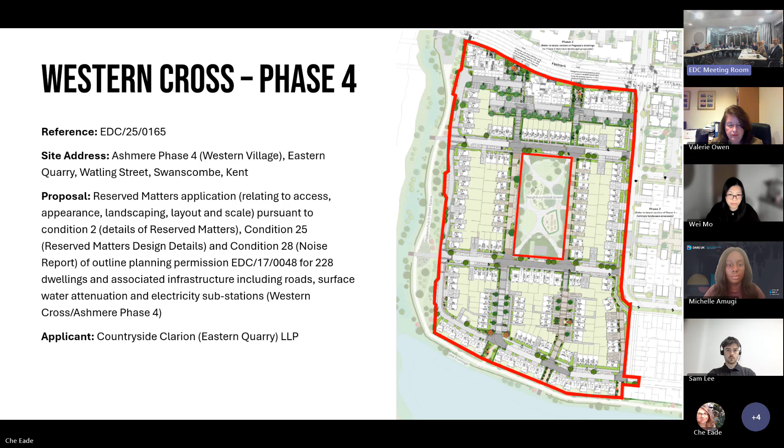So to the main presentation, I can confirm the proposals before you tonight are made by Countryside Clarion LLP and seek permission for all reserved matters for 228 dwellings, comprising 87 one- and two-bed apartments and 141 two-, three- and four-bed dwellings, made pursuant to conditions 2, 25 and 28 of Eastern Quarry's outline planning permission.

The application site is located within Eastern Quarry, also known as Whitecliff, which forms a strategic development site within the EDC area comprising 3 villages, including Western Cross, previously referred to as Ashmere. The master plan for Eastern Quarry embeds principles of sustainability in creating walkable neighbourhoods and a fast-track bus corridor, now operational through the site, providing regular public transport connections to Ebbsfleet International Station, Bluewater, and the centres of Gravesend and Dartford beyond.

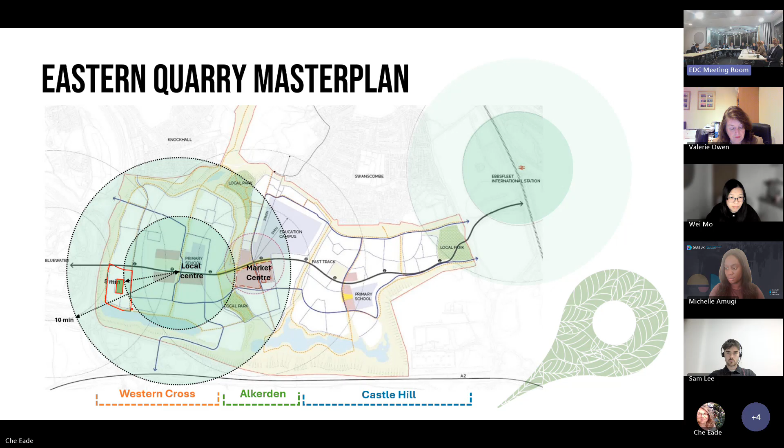The site is located in the southwest corner of Western Cross, within a 5 to 8 minute walk to the planned local centre within this village, and within a 10-minute walk to the Alkerden Market Centre, which contains the education campus due to open in September 2026, and the Alkerden Community Hub, expected to be operational in 2027. The site is bound by Fast Track to the north, Western Cross phase 3 to the east, and public open space to the south and west.

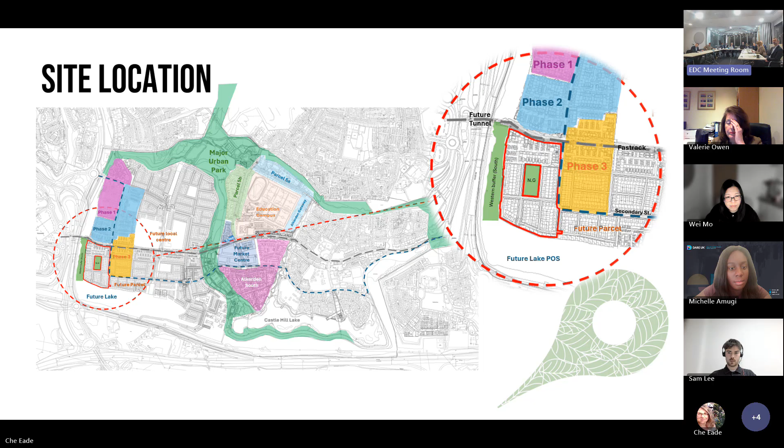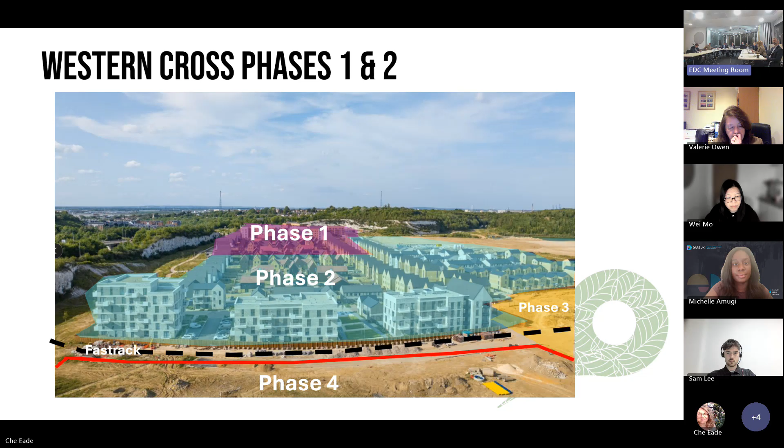Notably, the central neighbourhood green has been omitted from the submission, as it would be delivered separately by the Whitecliff site-wide developer Henley Camland. The proposed development follows on from Countryside's earlier, now award-winning phases to the north of the site, phases 1 and 2 pictured as built on screen, and their third phase to the east, which was approved by this committee in March of this year. Also shown is the current route of fast-track buses, which turns northwards through phases 2 and 1 currently, but will eventually continue west through the fast-track tunnels to Bluewater, due to be completed in 2027.

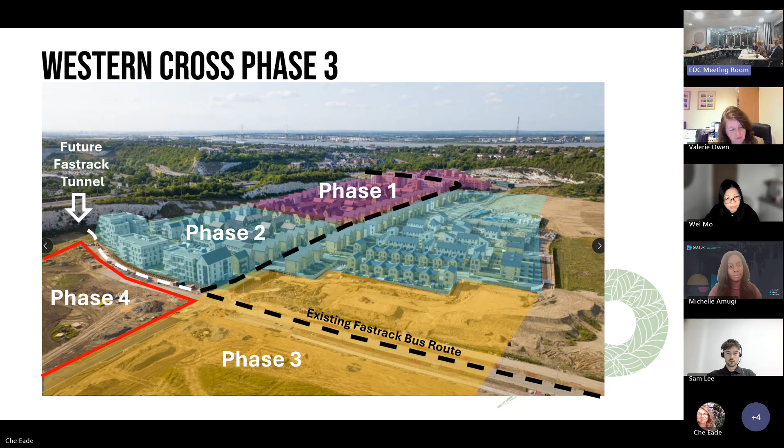In terms of access and layout, the proposals comply well with the layout and street typologies identified in the Area Master Plan and Design Code for Western Cross. The layout prioritises connectivity, legibility and pedestrian experience through a permeable grid-style street network and integrates seamlessly with previous phases to the north and east of the site. The primary vehicle access is from the secondary street on the eastern boundary, continuing the roadway established in phases 2 and 3. Tertiary streets run east to west, providing the primary vehicular connections through the site, while mews streets introduce shared surfaces around the neighbourhood green and southern footpaths, prioritising pedestrians and cyclists.

In terms of car parking, the scheme utilises a number of parking typologies to ensure visual impact on the public realm is minimised. Parking for the proposed houses is primarily provided as on-plot tandem parking. Terrace houses will largely utilise well-landscaped forecourt parking, and parking for the apartments is provided within undercroft spaces and carefully landscaped parking courts.

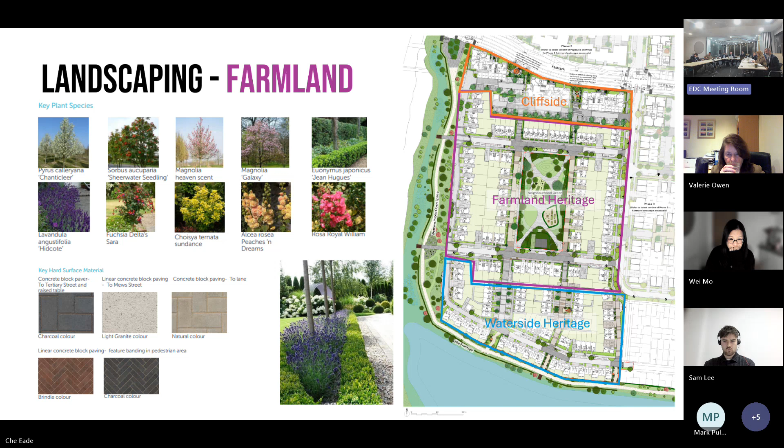The farmland heritage area focuses on spring blossom trees, ornamental shrubs and herbaceous species to reflect the informal orchard and farmyard character. And the waterside heritage landscape creates an informal setting inspired by its proximity to the water.

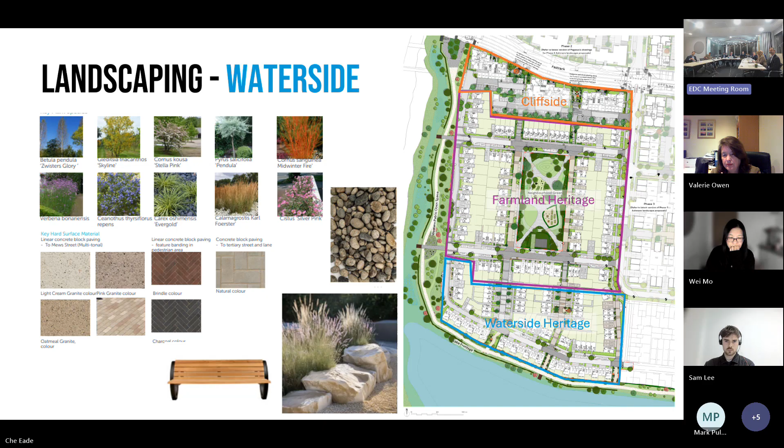Street furniture across the scheme complements these 3 character areas, and the landscaping is supported by a comprehensive landscape management plan, ensuring long-term maintenance, and planning conditions will secure detailed planting schedules, hard surfacing and boundary treatments. Overall, the strategy delivers a high quality, biodiverse environment and reinforces the site's character to create a strong sense of place. Turning to matters of scale and appearance, the applicants have developed a coherent approach to architecture and character which

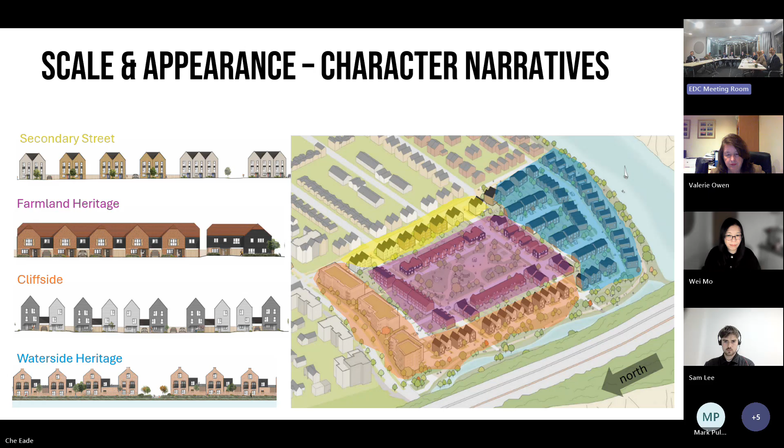mirrors the preceding phase along the secondary street and establishes 3 other character areas, being the cliffside area along Fastrack and the Western Edge, farmland heritage around the neighbourhood green and waterside heritage to the south of the site. The cliffside area along Fastrack provides bold apartment buildings to frame the edge and Fastrack gateway and reflects that which has been completed on phases 2 to the north.

A restrained palette of white, grey and buff brick alongside deliberately varied roof lines reinforces this geological character and creates a sharp contemporary frontage. Balconies use perforated metal panels with organic patterns that reference cliffside planting, and touches of green bricks are used in parts to suggest vegetation.

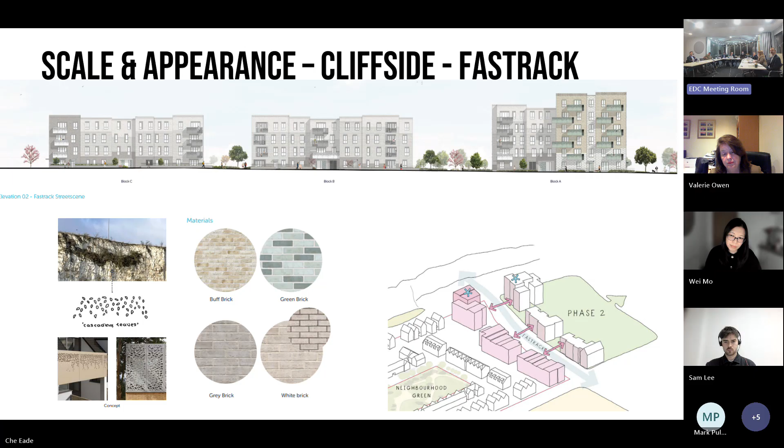The houses along the western edge comprise grey and white detached weatherboarded homes overlooking cliffs and continue the form and appearance of Western Edge established in phases 1 and 2.

Farmland heritage occupies the centre of the site around the neighbourhood green. These buildings introduce a softer domestic scale with architectural drawing inspiration from Kentish farmsteads. Terraced and semi-detached homes use red brick and horizontal weatherboarding or tile hanging with clay tiled roofs and simple timbered porches to create warmth and familiarity.

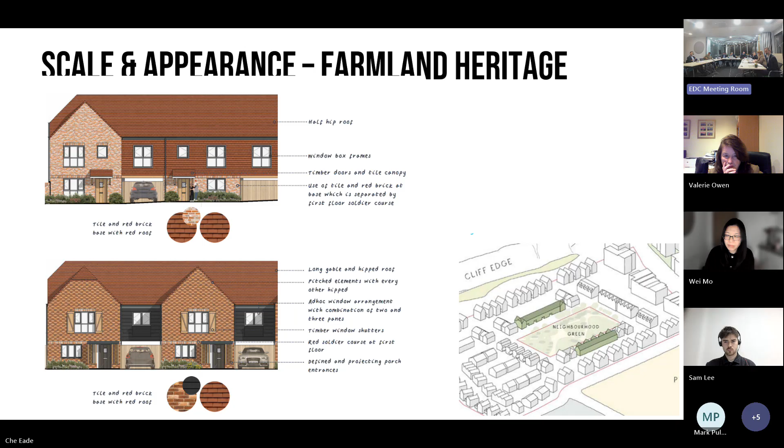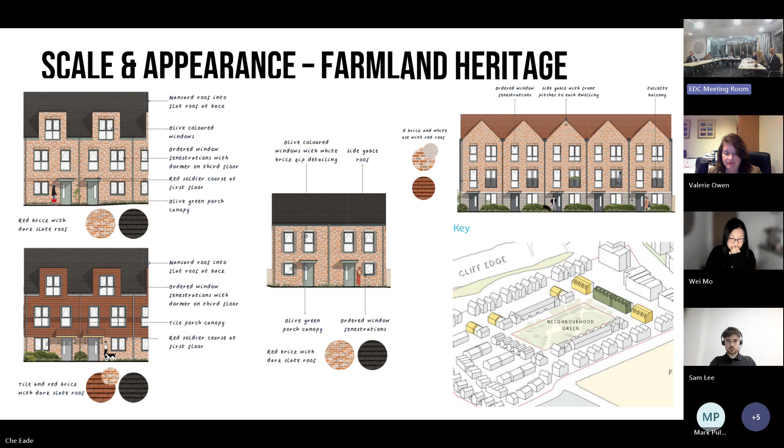The details such as soldier courses, corbelled eaves and occasional patterned brickwork give the buildings texture and a sense of craftsmanship, while more formal, symmetrical frontages around the neighbourhood green help to define it as a central space.

The waterside heritage character area draws on its industrial language of wharves, warehouses and traditional terrace house forms. The homes situated in this part of the site rely on robust red brick with darker slate accents. Wide gables and sawtooth roof forms nod to dockside architecture, and striking detached homes with side gardens and distinctive gable features punctuate the lake edge.

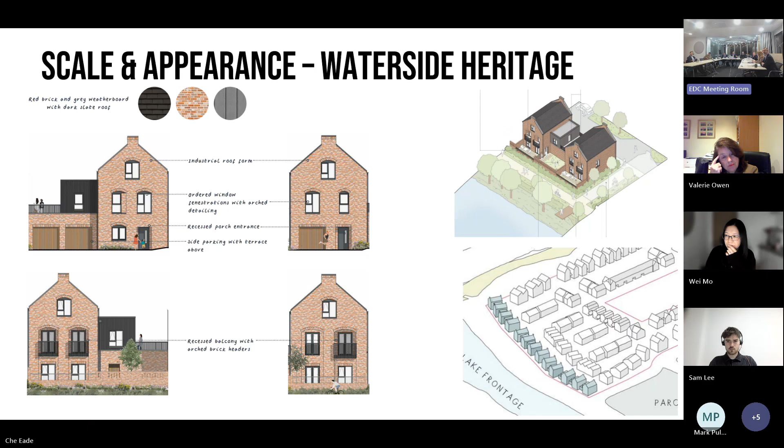When taken together, buildings and streets are visually appealing. The use of different character typologies as part of the wider narrative is effective in providing visual interest throughout the scheme and will also assist wayfinding and is viewed positively by officers.

The proposed development ensures delivery of 57 affordable homes, equating to 25% of the total required by the Section 106. 11 houses are proposed for affordable rent, and Dartford Council has confirmed that they are satisfied with the proposals, noting it would directly address local need and help tackle current shortages for socially rented larger family homes.

As one of the first schemes to be fully tested by EDC officers following publication of the EDC sustainability guidance, which stems from the latest Dartford plan and Ebbsfleet's environmental sustainability framework, the applicant's submission is supported by a detailed energy statement, sustainability assessment spreadsheet and circular economy statement, and completed versions of the EDC sustainability appraisal, shown on screen. The sustainability performance of this phase is mixed but progressing.

Carbon and energy measures achieve mid-level results, with PV panels limited to apartments, but air source heat pumps and smart meters included. Circular economy principles are embedded, committing to 30% reused materials, 50% responsibly sourced, and zero non-hazardous materials to landfill. Health and well-being performance is strong, with homes meeting accessibility standards, excellent daylight, and benefiting from good transport links. Water efficiency meets 104 litres per person per day, supported by rainwater butts on houses.

Natural environment measures include green roofs and food growing spaces, and while urban greening and tree canopy coverage could have been improved, biodiversity features like integrated bat and bird boxes are noted. Overall, the scheme leaves scope for more renewable energy and on-site SUDs.

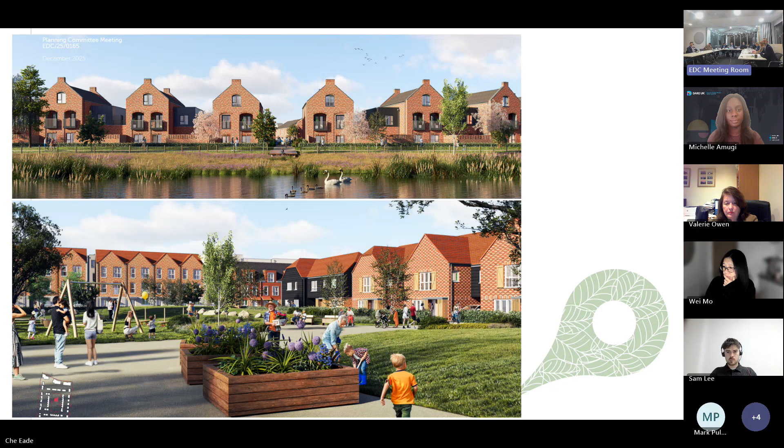However, it exceeds the baseline standards and will deliver meaningful carbon reductions beyond minimum regulatory standards and is therefore supported. Overall, the proposals are considered to deliver a high-quality scheme which accords well with the Area Master Plan and Design Code and is policy compliant.

The scheme scores very highly on the Building for a Healthy Life assessment, achieving the maximum 12 greens. It's 100% compliant with nationally described space standards and provides a range of unit sizes to meet the needs of a variety of occupiers. Parking provision is compliant with the Sustainable Travel Strategy and supported by a robust car parking management plan. 100% of units meet Part M4(2) of the building regulations, which considerably exceeds the 25% required by the Outline Planning Permission.

Therefore, in conclusion, this is a positive scheme which will deliver high-quality homes contributing to the ongoing development of Whitecliffe and Ebbsfleet. It is therefore recommended for approval, subject to the conditions detailed in the committee report and as amended in the supplementary. Thank you.

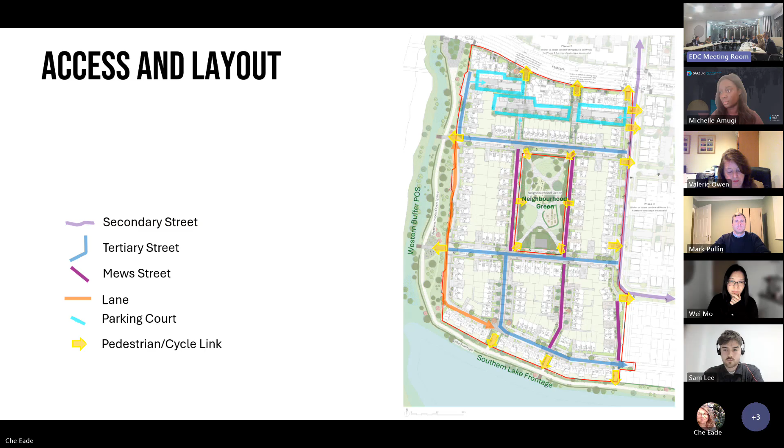Well, we did consultation before we submitted the application. Had very little interest, I would add. We were completely transparent on what was being provided. At that stage, I think the visitor parking ratio was even lower than it is now for you, so it's gone up since then. So we've had no concerns raised by residents.

I think as well, Sam Lee - I work for Ardent Consulting Engineers, I'm the transport consultant on the scheme. Part of that as well is the car parking management plan that's going to be conditioned as part of any future consent. So that's a monitored document which will be reviewed. So any issues that may arise or potentially could arise will be monitored as part of that. So it's something that we are looking towards.

Thank you. I've got another question on that, but I go to Michelle first please. Thank you. So just a question around the management of the communal green areas under development. I just wanted to clarify whether that will be under Henley Camland's responsibility, or if the developer, the builder, will be overseeing the landscaped communal areas under development.

So are you referring to the neighbourhood green in the middle there? Yeah, the park and then the other green areas around that don't belong to people. Yeah, so the neighbourhood green in the centre of the site will be the responsibility of Henley Camland to deliver and maintain. What I would say is the managing agent for the scheme is a company called RMG. They're managing phases 1 and 2, but they also manage the entirety of Eastern Quarry, so they work on behalf of Henley and us. So there's direct interface between the residential areas and the wider estate areas - it's the same company that manages the whole thing.

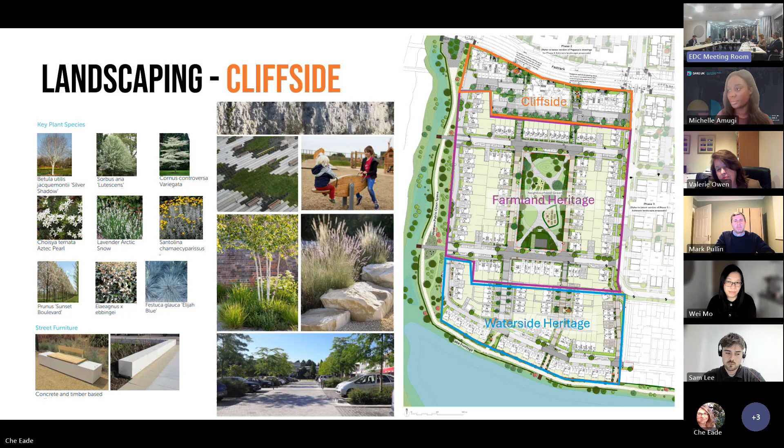But just on the parking, I noticed that the standards are complied with, so that is, you're given the standards, you try to work to them. But I noticed that on the table at 6109, committee report, page 51, it excludes the 66 second tandem spaces, which may or may not be used by people living there or by people visiting.

But my question is about Fast Track, because Fast Track is now serving this part of the site, which it wasn't when some of the original development took place. And what I'd quite like to know is, has there been - and it may be this is for the officers rather than for you - has there been take up of Fast Track? Have people been using it? Because in the end it will go through a tunnel to Bluewater, but it is up and running. Having seen it, are people using it?

I can come back to you on that, Chair. So yes, Fast Track was commenced through Eastern Quarry, Whitecliff in September.

Essentially from that point, Route E that supports this section has seen a doubling in patronage. I got November statistics through the Whitecliff Fast Track working group, which noted that for November we had approximately 20,000 journeys on that route, and a quarter of those boarded at Whitecliff, at the stops within the quarry. So I think that's significant.

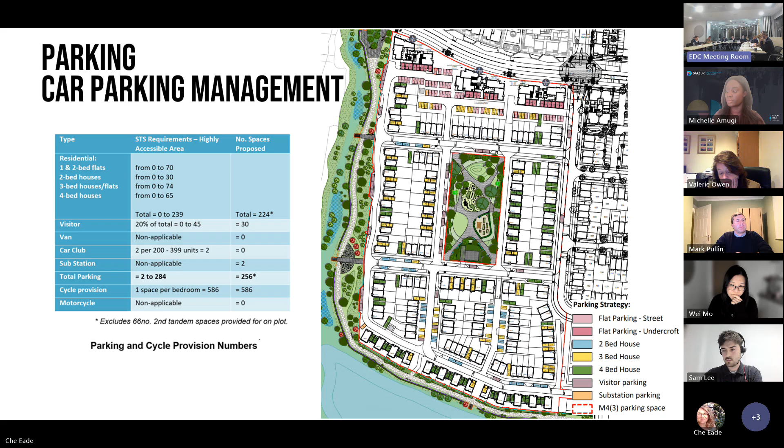First one, really around sustainability - you said the scheme exceeds building regulation requirements. In terms of PV, coverage is quite limited, just to apartments. I think it'd be useful to understand why it's not more widely used. The second question was about the risk of overheating on particular units, and you mentioned consideration of that. It'd be useful to know more detail about how the risk of overheating is going to be tackled in those units.

Okay, I will answer these - chip in if you've got anything to add. On the PV front, I think what we're managing to achieve is a significant carbon reduction through the use of air source heat pumps, fabric-first approach, etc. The PVs are being provided to the apartments, which more readily support them en masse, but for the houses, we did explore that, and they're being designed so they'll be structurally sufficient to accommodate PV in the future should people want to install them. So that's the approach on PV.

And then the other question was on overheating. An overheating assessment has been undertaken. That has to sit alongside the sunlight daylight assessment and the noise assessment, balancing off those factors. The conclusion is that there are some apartments, very limited, in Block A, top 2 floors, which could suffer from unacceptable levels of overheating. But those apartments will be fitted with mechanical ventilation heat recovery systems that provide cooling, so they don't have to open their windows where there's a noise situation.

Any other questions from members? Michelle?

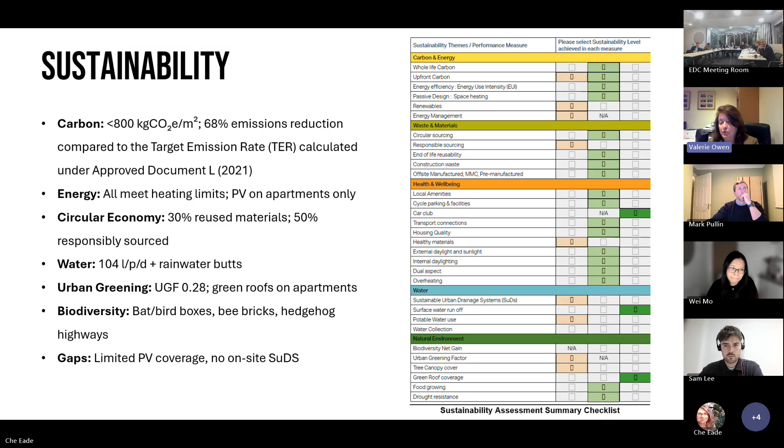Thank you. So leading on from that, you then discuss the mix itself and the lack of larger homes, and basically say, well, Dartford thinks it's okay, so we think it's okay. But I find it slightly curious, really, because in fact there are a very large number of larger homes - there's 94 3-bedroom and 4-bedroom houses, but all in the private for sale element. It just then begs the question as to why more of those could not have been flipped into larger homes for both affordable rent and shared ownership, because it's not as if they're not included in the design. Do you see what I mean? I couldn't quite understand the logic, given that one would assume there are more likely to be larger families in affordable rent and shared ownership units anyway. But I don't quite understand or follow the thinking behind it.

Deathly silence. So 94, which is a large number, that's great, but almost none in affordable rent and proposed shared ownership. I was going to say that we heard from the applicant, and this was now the time for the officers, but if the applicant has an answer, I'm happy to take it, and then I'm going to say thank you to the applicant, and we're going to move on to a general discussion. Okay, give the first response.

I was just going to say that the mix for affordable rent units is in accordance with the Section 106 agreement. The Section 106 agreement does state that the mix for affordable must align with the private sale mix, and we make sure that we are exactly aligned on that. There has been an improvement in this phase - we've delivered more larger family homes than we've ever delivered on the previous phases. We have 3 4-bed houses for affordable rent and 4 3-bed houses for affordable rent, which if you compare with the previous phase, we had 4 3-beds and 2 4-beds. So we are improving the larger family homes that we're delivering in this phase compared to any phase delivered before, and it is completely compliant with the requirements under the Section 106 agreement, and Dartford Borough Council confirmed that this meets their housing need. In addition to the affordable rent, there's also going to be 11 3-bed houses shared ownership as well, family sized.

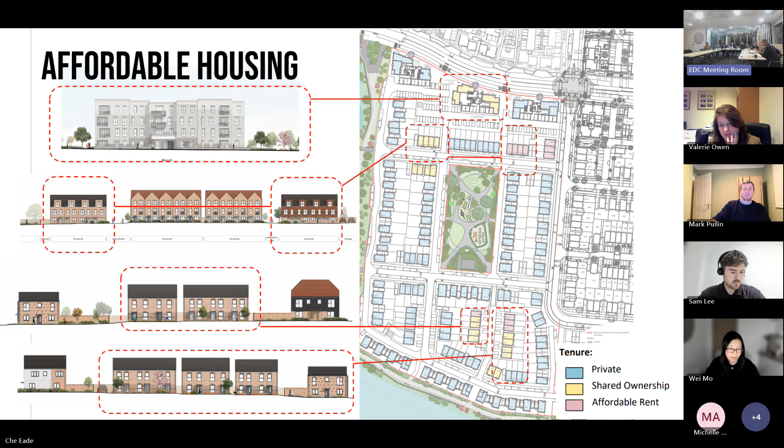Ashley: It seems to me that the applicant has responded positively to the pre-app discussions and taken into account some of the feedback planning officers have raised. That's good to see. In terms of building for life and its requirements, I do like the 3 distinct design and character areas. It seems to have had a mix.

I entirely take on board Valerie's comments about affordable housing, and obviously we'd always want more, but I can imagine in Dartford's housing register that, for example, 3 and 4-bedroom houses would be like gold dust for large families on their housing list. It is good to see that.

David: I would concur. I have to say I do like the look of this particular development. It mirrors a lot of the other stuff we've seen. The environmental aspects of it, I was very, very impressed with.

Very good. The property size and the tenure is good, because so often we see lots of small houses which aren't needed. It's large houses that are needed.

The one thing we are suffering though in Dartford is whenever we start looking at large properties, some of those are now being bought and converted into HMOs. I don't know if you've experienced that here at Ebbsfleet yet, but it's certainly happening in places like Gravesend and around Dartford.

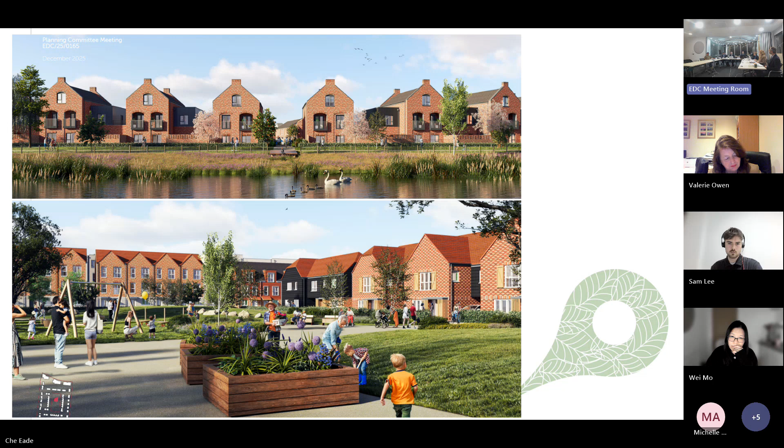And Valerie's other question was, what's the point of Condition 8B? As I understand it, the words in 8B, after confirmation, are subject to suitable evidence to justify an alternative approach for specified areas of the site where this may compromise other design outcomes. I'll let officers explain it, but what I understand is that a concern has been expressed about the proportion of native trees and shrubs and the impact that can have on design, and the aim of this condition is to ensure we do get 25% native trees and shrubs. If somebody says that compromises other design outcomes, such as foundations or water or something, they have to prove it. So I think that's the point, if I've understood it properly.

Yeah. But, thanks very much. Yeah, that makes sense. Thank you.

Right, well, we have a recommendation before us that we approve these details submitted under the Reserved Matters application. I'm going to suggest that we accept the officer recommendation. So I will put that proposal, taking into account supplementary information. I think we've already done that, but we'll take that into account. So I'll put that proposal to the committee.

So I'll first take a vote of those in favour. Yes. Michelle? Yeah. Yes, you are right. Good. In favour, or did you have an issue? Sorry, in favour, in favour. Okay, well, I think that's everybody. So that's unanimous. Thank you very much, everybody.